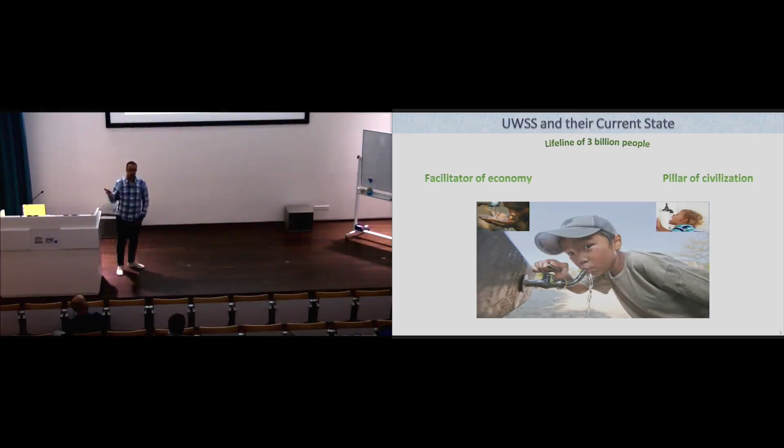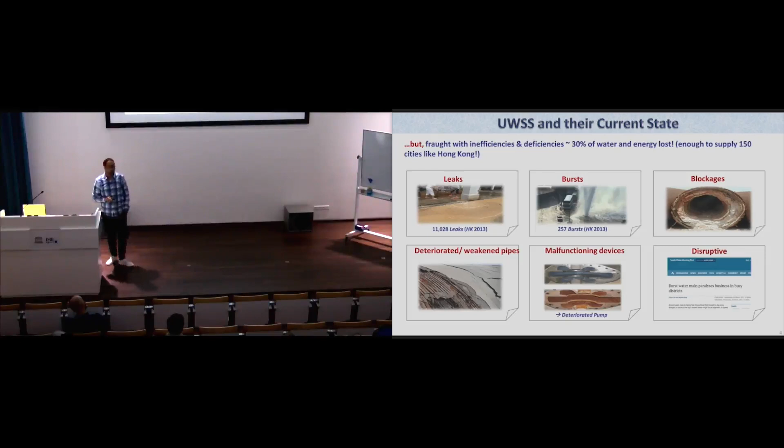Now, water supply systems, they're very complex. You all know that these pipes are underground. You have no access. So things are just happening, and you don't know what's happening. You don't know where the leak is. You don't know where the blockages are. And even if you know, it takes a lot of money to go and fix it, because you have to interrupt the roads. You have to stop everything. You have to dig a hole and do all of that.

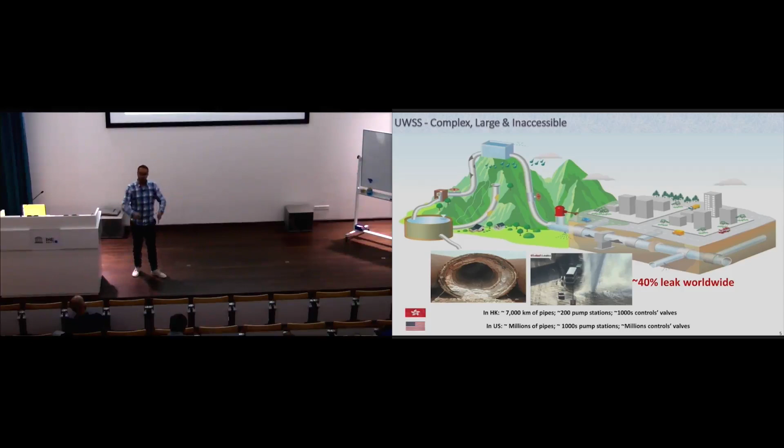Now, the current solutions for leak detection and blockage detection, the most advanced systems, are the Sahara system and SmartBall. This is the most advanced state-of-the-art for leak detection that exists now in the world. This system is basically to send a sensor that moves with the flow, and a guy here listens to this sensor, and if there is a leak, you will detect it. This one, it's a ball. This ball, you basically put it in the pipe, and then you have to fish for it.

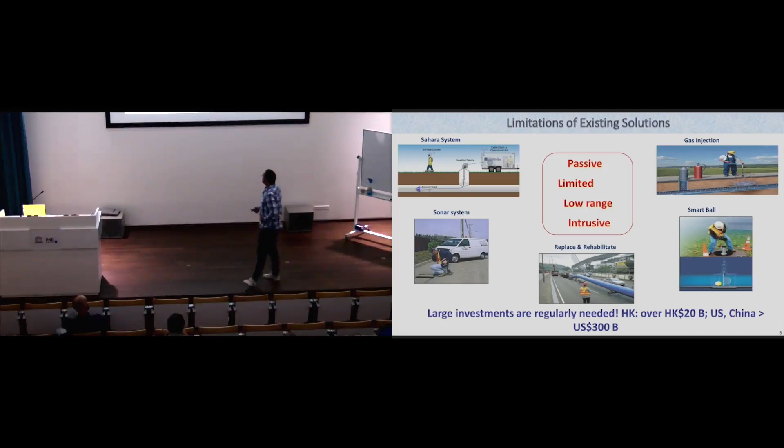Now, what's the problem with these things? They're all passive. They're still very limited, and currently we still have a lot of leakages, even though people are using these systems. They call it the smart ball, but yet it costs about $5,000 to $7,000 US. And after they bought it in China, they ended up with 70% of them becoming blockages, because you put them in, you try to fish them somewhere else, but you don't find them. They get stuck somewhere, and then they become themselves a problem. So you need to think of something else for leak detection.

Now, what we're trying to do is actually mimic other fields, which use waves. Now, waves, we are very used to the idea that you go to a doctor, you do an X-ray, you send electromagnetic waves, and that will give you images of what's happening inside your body, inside your system, right? Sonography is the same thing. You can see the baby if you send acoustic waves, ultrasound, and it shows you the form and image of the baby, right? Some of these waves are used also for defects inside material, and people are using it also for oceanography.

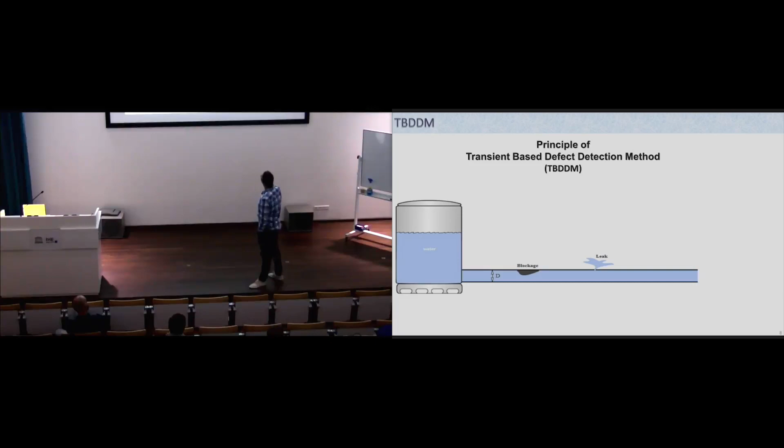Now, we're trying to do the same thing, but with pipelines. Instead of calling it X-ray, we call it transient-based defect detection method. Transient is mainly acoustic wave. That's what we mean by transient wave. Now, the way it works, you have a pipe system like this, and then you come somewhere at a given boundary. This boundary could be a fire hydrant. You go to a fire hydrant, you open the water. This is what we do in Hong Kong. You open the water and you close this valve suddenly, for example.

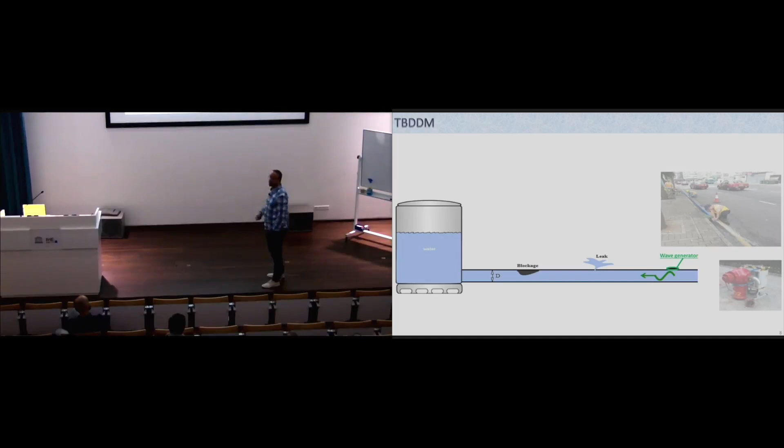Then you create a wave. This wave will start to propagate inside the pipe, and this is an image of what's happening for the signal as you measure here. So as you measure, you meet a leak, a reflection will happen. You meet a blockage, a reflection will happen. We get the signal, we study the signal, and we do some signal processing, and we can tell where the leak is, where the blockage is.

What's great about these methods is they are very quick. The wave speed is about 1 kilometer per second. Now, to feel that, that speed is about 5 times the speed of an airplane. So when we go to the field, within 5 seconds, we do this, we finish the test, we take the data, and we show you what's happening. That's ideal, of course. There are complications which we're going to show you. Now, this is the basic idea.

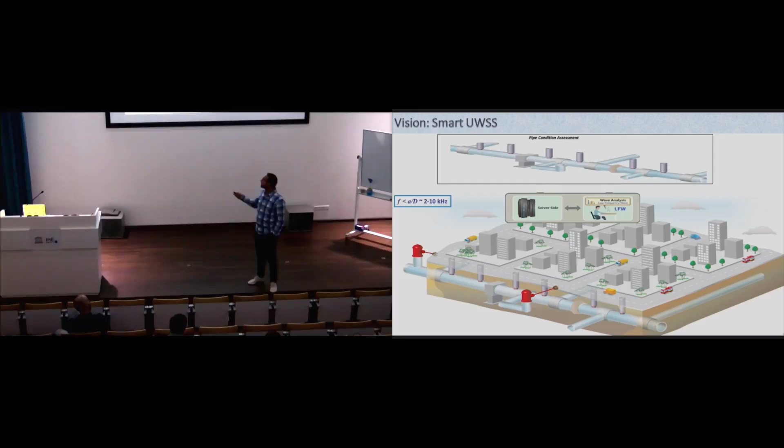Now, the vision of a smart system. What's the vision? The vision is having a network like this. You go to some access point. The access point can only be a fire hydrant because everything is under the ground. You go somewhere there and you send a wave. Initially, we send what we call a low frequency wave.

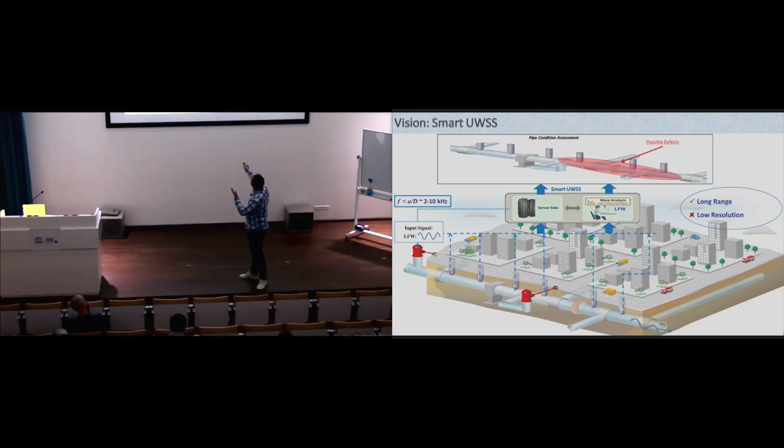Low frequency waves, if it's at low frequency, the wave can propagate for a long range, kilometers. Okay, they can go up to 5 kilometers. However, the resolution is very bad. It means it cannot tell you exactly where the defect is. It can only give you an area. This area could be 100 meters, 200 meters, right?

So what we need to do, once we know that the defect is somewhere in this area, which is a region, then we need to go somewhere closer and send a high frequency. High frequency gives you high resolution. In medicine it is the same thing. You go to ultrasound, that's why they use ultrasound, it is high frequency. X-ray is also high frequency. So once you do that, then you have high resolution. The range is very short and you get high resolution.

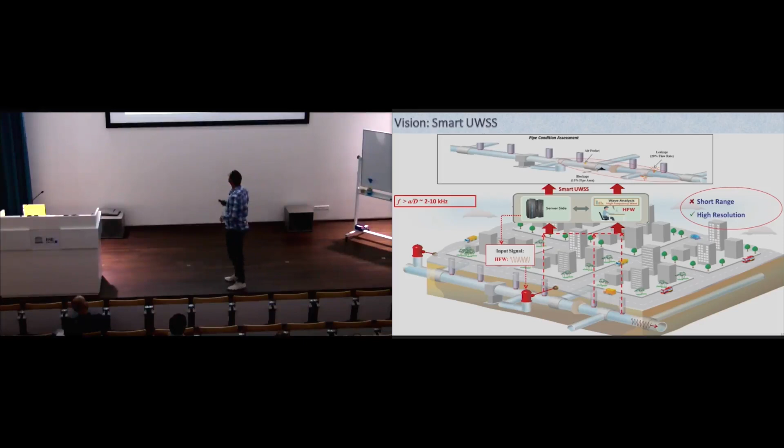Now, this is basically the vision. Send waves, low frequency, get a possible area where the problem is, send high frequency, get good resolution and it tells you where the leak is. This is what we do for the project. Now, our project basically has 4 tasks.

Now, one task is to design experimental setups to validate any results that we need to validate. Task 2 is basically a forward problem analysis. These are mainly the 2 tasks that I usually lead in this project. A forward problem is to understand how waves interact with defects. So if there is a leak and you send a wave, what will happen between the wave and the leak? How do they interact? What kind of reflection am I going to get and why?

This task is talking to signal processing and the inverse problem. The inverse problem is basically a mathematical algorithm: you get some information, you run the algorithm, it tells you where the leak or the blockage is. So these are the detection methods here. Signal processing is, you all know what signal processing is, what type of signal I have to use, how do I reduce the noise, and all of that.

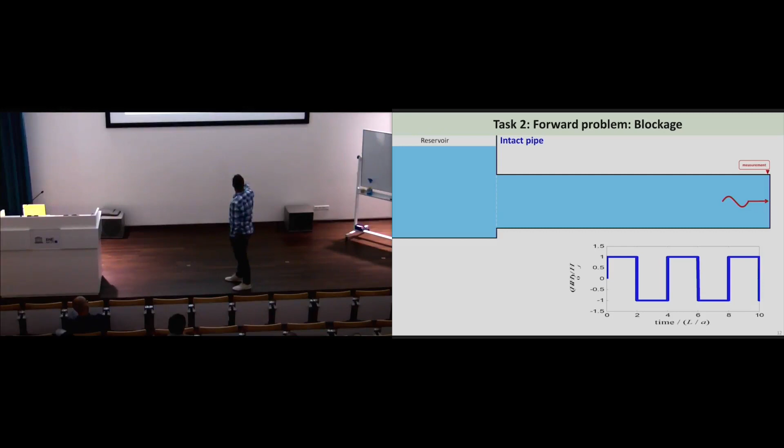Now, I'll show you some work that we did here, and then I will go through the different facilities that we have and show you some examples of the data that we get and the type of detection that we are doing. So I need to introduce this. First of all, we go to a pipe system, we send a wave, and we measure this wave using the transducer, and we get the signal in time domain. This is the type of signal that we get, what we usually call a water hammer type of signal.

Now, we usually work in frequency domain; it's much easier to do signal processing in frequency domain. And then we study the modes. These are resonant frequencies and resonant modes, what sometimes you can call standing waves inside the pipe system.

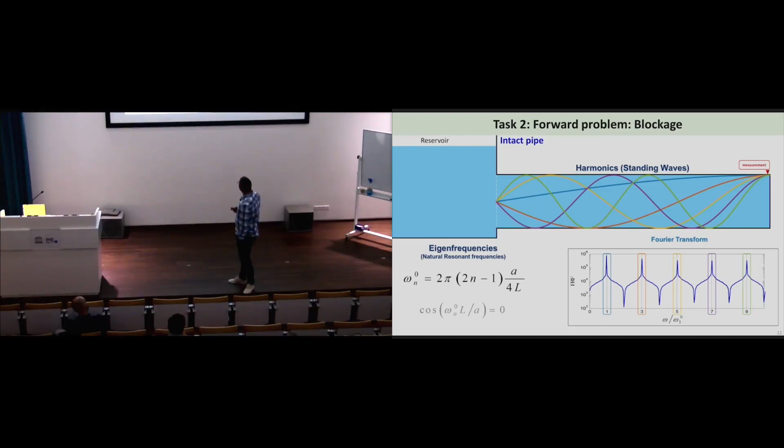But task 2, what we mean by a forward problem, is basically this. When I see a shift going to the left and a shift going to the right, the question to ask is why? Why did that happen? Why has a shift occurred? Why did it go to the left? Why did it go to the right? So that we understand how the wave is interacting with the blockage.

Now we study that, we simplify the problem, and we look at the wave propagating and there is a blockage, and we look at reflection, how much is reflected, how much is transmitted. We do that, we end up with something quite nice, that there are some frequencies at which the wave transmits the most, and some frequencies at which the wave reflects the most. So this is what we call maximum reflection frequency, and this is maximum transmission frequency.

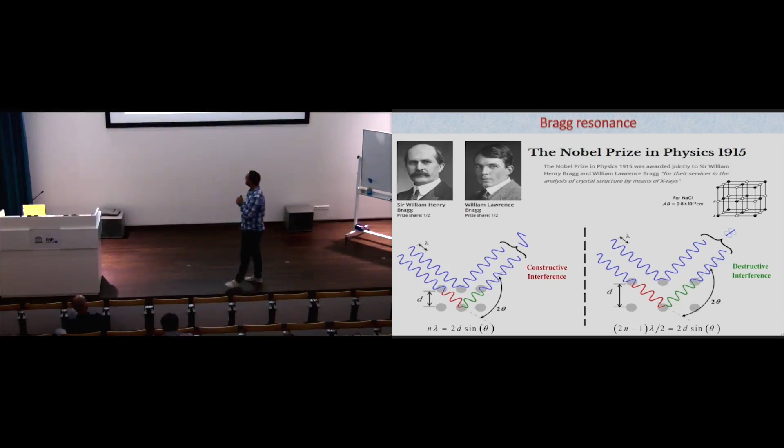So, physically what is happening, you send a wave, the wave at the blockage, some of it transmits, some of it reflects, right? Now, this transmitted wave also will reflect back. Now there is a question. If the frequency is such a way, this reflection comes out in phase or in opposite phase. If this comes out in phase, then you have resonance, because the waves superimpose. But if it comes out in opposite phase, then nothing is coming back. They kill each other. That's how you end up having maximum reflection or a total transmission.

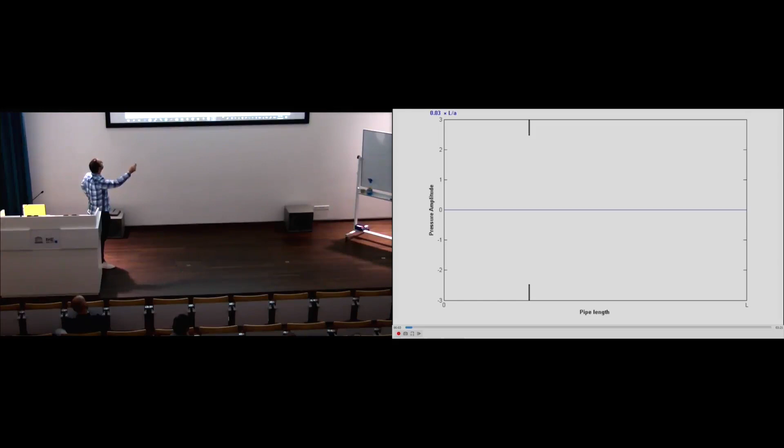So here I show you a video to help you see these things. This is the case for a total or maximum transmission. This is a pipe. You can look at it as a pipe. This is the blockage, and I'm sending a wave from here, and these are open boundaries. Okay, so the wave will come from here, and we'll see how much reflects, how much transmits. Normally, we should have a lot of transmission if I choose the right frequency.

So I speed it up manually, and here is the wave coming. So the wave comes, arrives at the blockage, and then it goes through it, and you can see that the wave is easily going through it. A bit of resonance happens here, but almost all of the wave is transmitted. You almost see no reflection. That's what we call Bragg resonance of maximum transmission. Very little reflection comes back because you cannot have a single frequency sine wave.

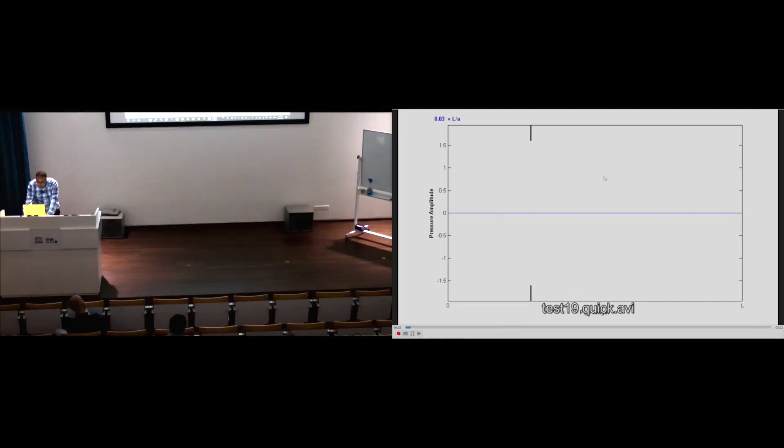Now, look at the case of maximum reflection. Same design, same blockage length, same things, but the frequency is slightly different for maximum reflection. You send this wave, it comes in, and then suddenly you can see that this is how much is reflected and that's how much is transmitted. You see now the reflection is very big, the transmission is little, right?

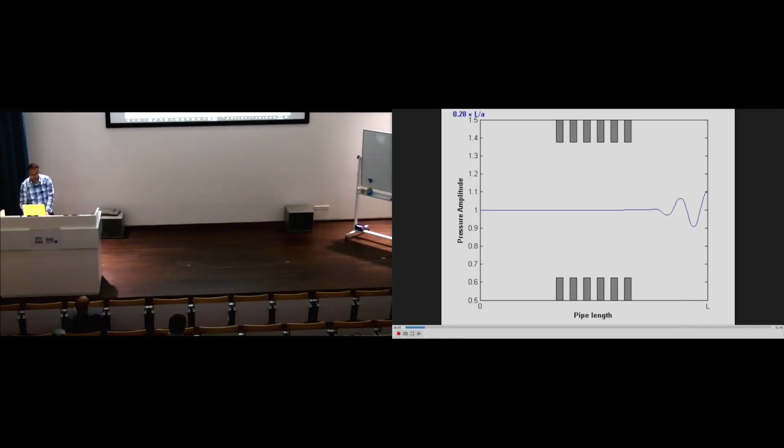A video that is always exciting for me to see for Bragg resonance, this is the case where we build many blockages that actually reflect, and you can see that you can stop the sound from passing for a given frequency. They try to go, but because of Bragg resonance, you have many of these blockages, 6 of them. You can see now nothing can go through, right? You keep sending, you resonate here, but nothing is going through.

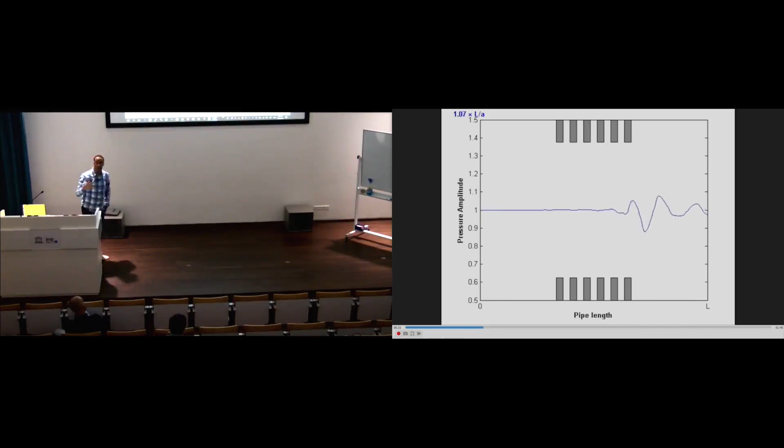So this is what we call a forward problem. Understand what happens. Now, because we understand what happens, we go back to our problem, to the blockage, and now we know exactly why it shifts to the left and why it shifts to the right, and it is well connected to Bragg resonance. That actually helps us improve all the previous methods for blockage detection.

The same thing also happens for leaks. I'll just go through it quickly. If you have a leak, then you have a leak at this boundary, and you have a boundary like this, and you see that Bragg resonance also occurs between these two layers. Maybe not clear, but there is a red color and a blue color. The blue is for intact, the red is for the leak case. For the case of a leak, there is no shifting. These resonant frequencies don't shift, but their amplitude becomes different. You see, this is high, low, and you have kind of an up and down in the amplitude.

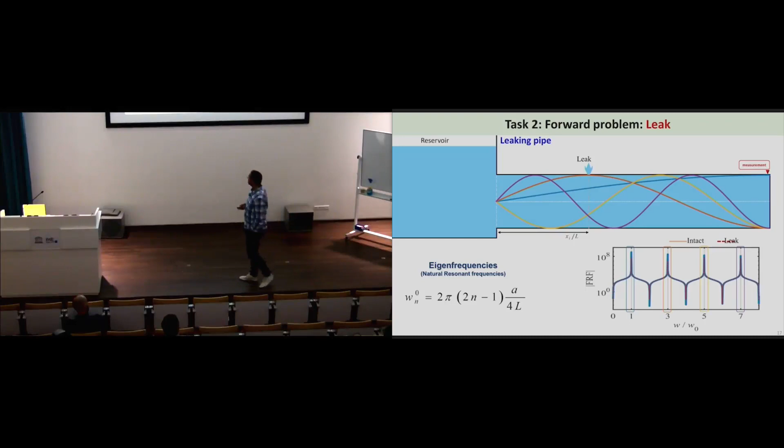That up and down turns out to be also related to Bragg resonance. And that's what we call forward problem analysis, to understand the physics. So basically the same thing. I want to go through this quickly.

And Bragg resonance gives us a big information that if you see a big drop in amplitude, that's because the leak for this mode is located at the maximum pressure. Now you can think about it. If a leak is located at the high pressure point, then you can push the water out. If you have energy, you push the water out, you relieve the pressure. It drops. And that's why we see a drop for this mode. The pressure is high, pushes the water a lot. The water comes out, the amplitude drops, and this is why we notice there is a drop.

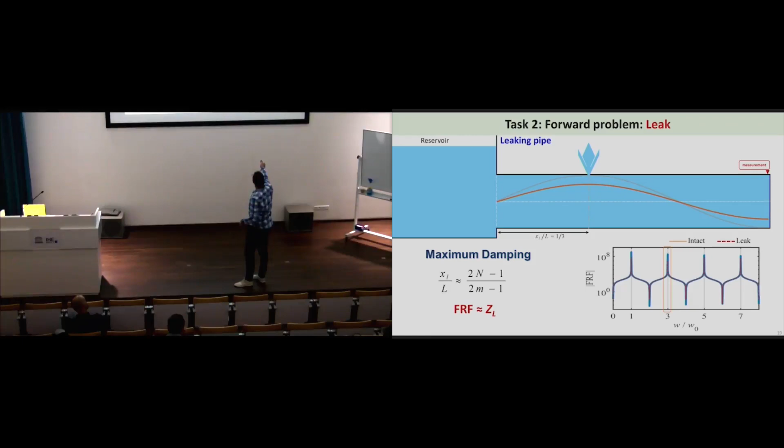However, if the leak is here, which is a zero or a node pressure, then you see no drop of amplitude. That's why you see up and down. You have different modes. Some of them have high pressure, like this one and this one, so they drop. However, this red one doesn't drop. The second mode, you see the amplitude is quite high. That's why you see an up and down. So it helps explaining what's happening, and it helps improving the leak detection methods, and it did.

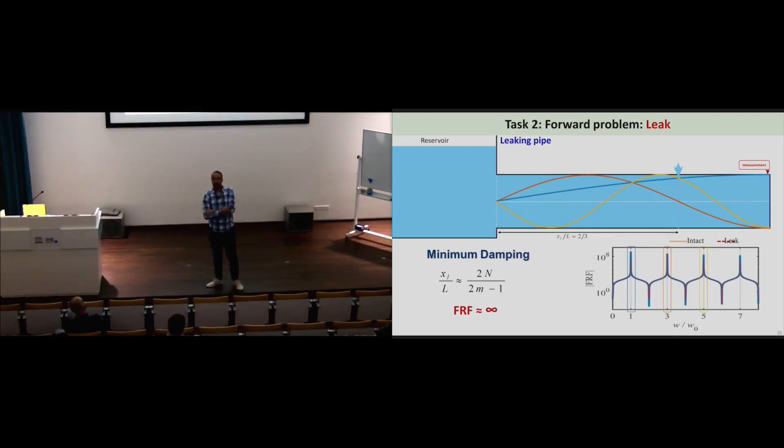Now I go back to the slide just to tell you that now I'm going to go through different results that we found, different methods that we applied. If I show the experimental setup, then that's task 1, and then what we do for task 2, and then what we do for task 3.

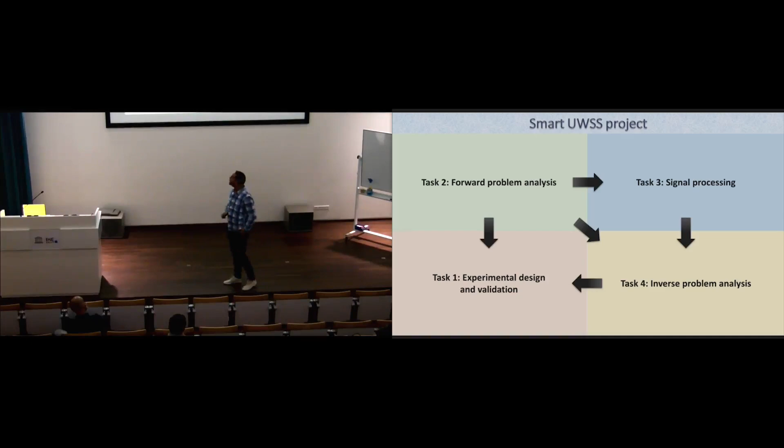Now here is our first experimental facility. So we have 3 in Hong Kong. One is a totally field experiment. The water supply department, we work with them. They give us a place with about 700 meters, a true network. We have access to 4 or 5 fire hydrants. We mainly work with 3. So it's somewhere in the street.

Now you look at this, you say, well, you did not really detect the leak, but given how sharp your wave is, because this is low frequency, you don't get good resolution. The best resolution that you can get is within your wavelength. In this case, our wavelength is within 30 to 40 meters. So that's why the resolution also will be within 20, 30 meters. You cannot get better than that unless you send high frequency. We haven't sent high frequency here yet.

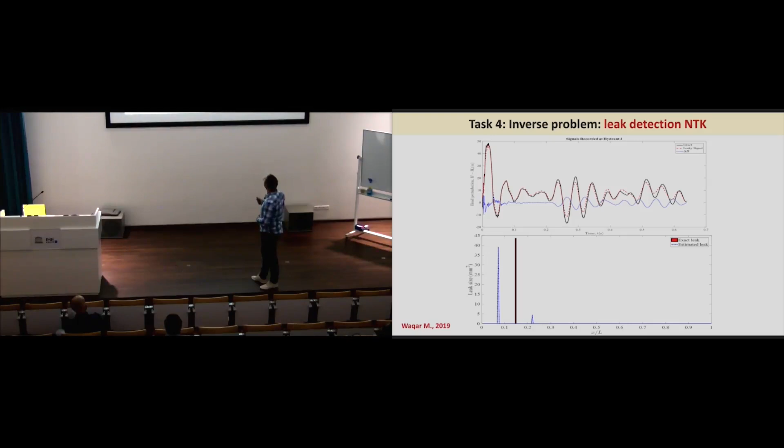Now this is the second facility. This is in Beacon Hill reservoir. It's a reservoir belonging to the water supply department. They give us access from a main pipe. They say, okay, you can take access from it and then build your own pipe. The pipe is 6-inch, quite large. And we build about 150 meters of pipe around it. We have an intake from a true main pipe, and then we build our own pipeline. And this is how it looks.

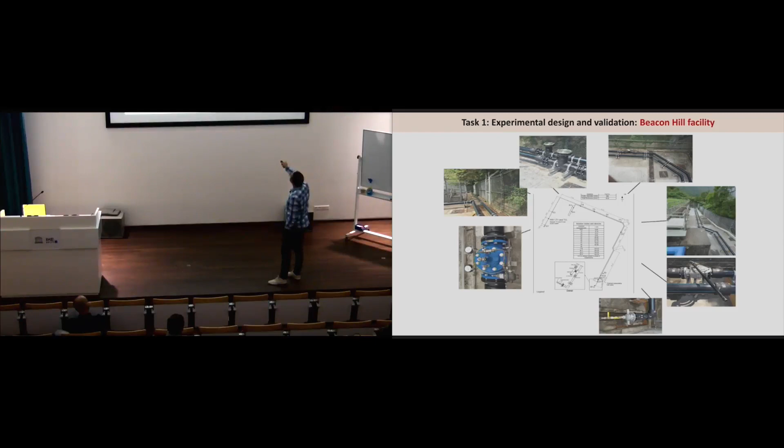Same thing, we measure different locations and we have different places like this where we have leaks. We can simulate leaks and we study what happened. And we have a pressure reducing valve, kind of a dynamic boundary to add in some complexity to the system.

These are some experimental results. We see different leak sizes, because sometimes you can detect a leak, but how big is the leak? If the leak is very big, then the water supply department will tell you anyone can see that leak, right? So we do very small, small, medium, and large, and then you can see a difference between them. The leak is somewhere here. You can see this drop is getting bigger and bigger.

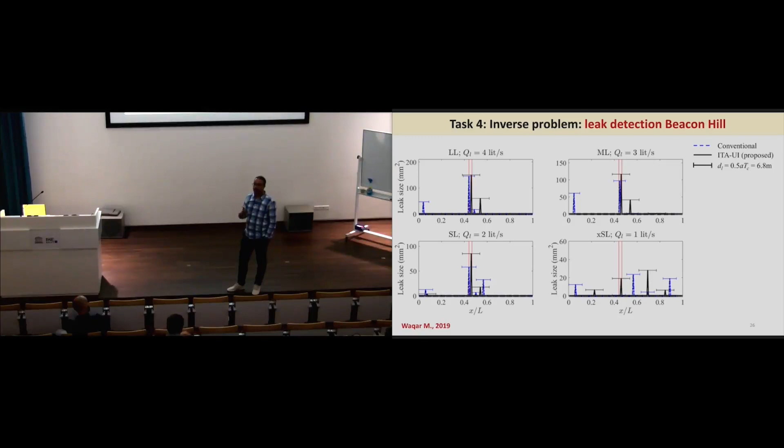Transient, inverse transient analysis. You can see that as the leak gets smaller, the detection is not that big. But of course, you still can catch it, and we keep on improving these methods because you still have some noise that you have to get rid of. So, if you study multiple leaks, in this case, for example, 2 leaks or 3 leaks, we are still able to detect it. Of course, you cannot give the exact location, but you can get close enough. These are real data, right?

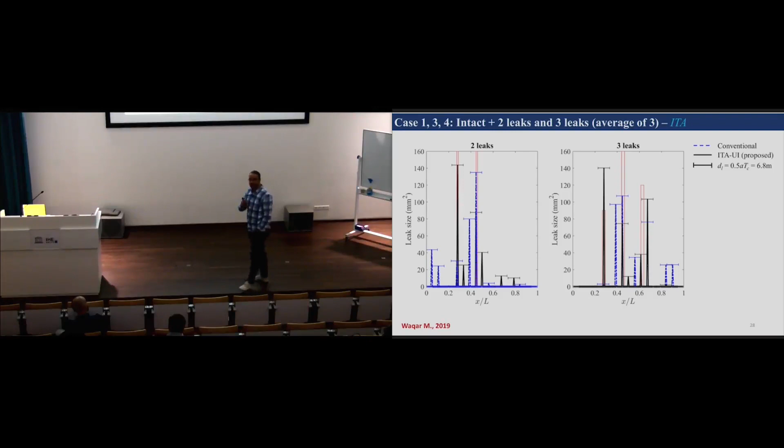And this is the case where we found out that leak detection is very sensitive to the pressure. If you go to Hong Kong, it is all mountains. You actually have high-rise buildings. So the pressure usually goes up to 10 bar. Very high pressure in these pipes. We found that the higher the pressure, the more difficult to find leaks, because leak reflections depend on the acoustic impedance of the leak. And this acoustic impedance is proportional to the pressure. The pressure is high, the impedance becomes very large, and then you get small reflections.

So we studied this. We found that if the pressure is 2 bar or 3 bar, the detection is good. But as the pressure becomes higher and higher, the detection becomes very little. So that's a big problem, and we're trying to find a way that even at high pressure, we can manage to still detect leaks.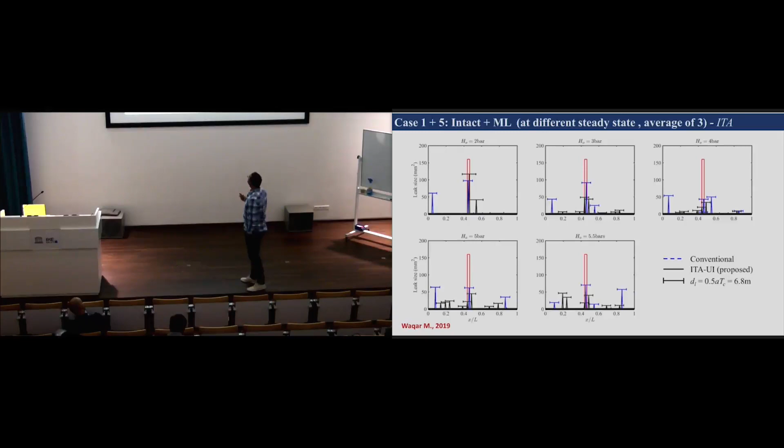Now this is another forward problem we've been working on. This is probably so far my favorite one. This is fascinating. Usually you get damping from a signal, right? You have viscoelastic effect if you have a plastic pipe. You have friction in the pipeline. You send a wave, the wave will start to damp. Now what this student is doing is trying to reverse, and wherever it has been damped, he can actually reconstruct it back.

Now look at this black line. This is numerically a signal with the friction and viscoelasticity terms. Now you can see you have damping, right? The pressure is getting reduced. What this guy does, he will take this signal, the black one, put it in an algorithm, and then bring back the intact case, as if no damping has happened. And that helps us a lot, because usually you lose information through damping. Now there is an algorithm that can give you back the undamped signal. And that way our detection becomes much better.

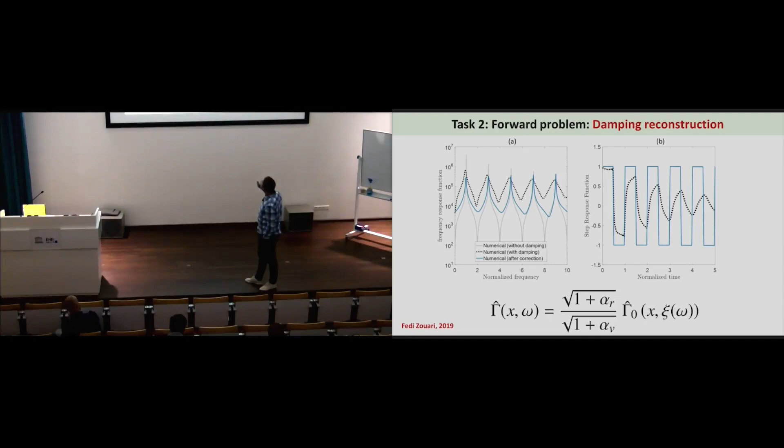Now he was able to do it because he can find a linearized relation between the damped signal and the undamped signal. So that's the relationship that he can build, therefore, this gamma 0, which is the intact case, from this one. This is what we measured, this is experiment, and this is from the model. If you give me this, I can get this one.

So we go to the lab and we try to validate this. This is the HKUST lab, university. So the lab has 150 meters. You can look at this complex system and say, why are these people crazy? You're making complications, lots of bends. Now the reason is, Hong Kong is very small. Hong Kong is tiny. The space is a big problem. So even for 150 meters, we have to go around the lab. Our lab is very small, maybe as big as this one. So we go around 3 times, and we have a pipe. We pump the system from this pump, and this is our downstream end.

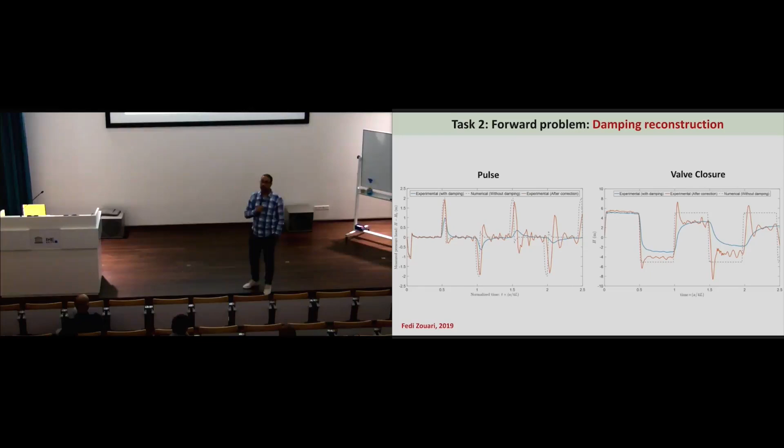We get the signal. The blue is the damped signal. The red is what we bring back. There is some noise, for sure, but you can see that the high frequency, the sharpness of the signal is coming back. And the sharper the signal, the better the detection of defects. For example, this is defect detection. This is what we call area reconstruction. You measure the signal, you give it to me, I put it in an algorithm for area reconstruction. Area reconstruction reconstructs the area like an image for you, how the area of a pipe looks.

So if we don't bring back, I mean, this is a comparison with using damped signal and undamped signal. You can see that one is before correction, one is after correction. Look at this case, for example. The red one is without correction.

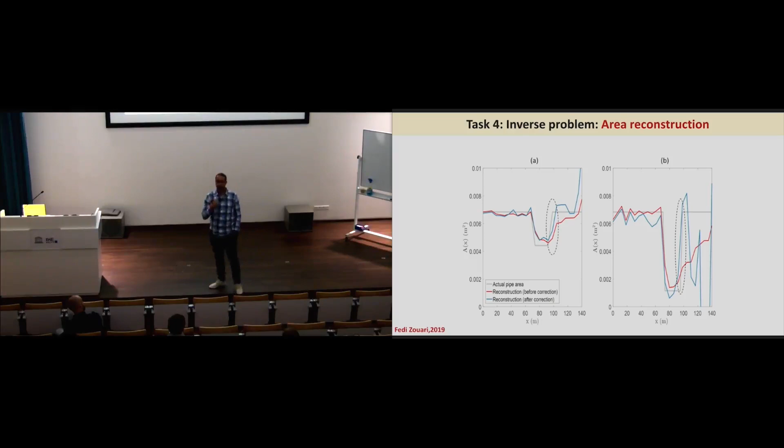You can see that we have a blockage here, and the blockage is poorly detected for the red one, right? But for the blue one, you get more sharp variation. So bringing back the damping, the information loss, actually gives you better resolution. So these are some sort of examples of what we do.

Now, accuracy is also important if you send the right signal. Sending the right signal is very important. If you send a valve closure signal, like a step function, it turns out it's not that good. So we found that sending a PRBS signal, which is a random sequence of opening and closing a valve, is very important. And recently we started to build valves that we can control in such a way we can send any signal we want from the valve.

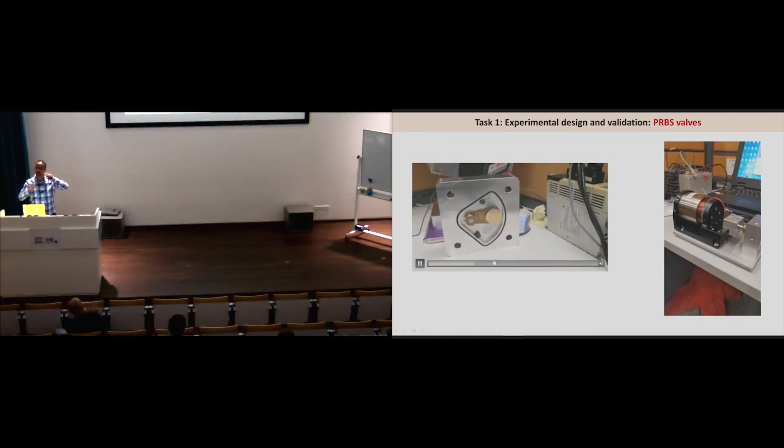This is just a quick video to show you a valve that we just constructed that opens and closes, and you can control the speed, the position, and everything. So this is 3/4 inch pipe, and this one is a 4 millimeter pipe. So this is the valve, this is the linear motor that we just showed can be quite fast to open and close these valves. So just an overview of what we have and what we're trying to do.

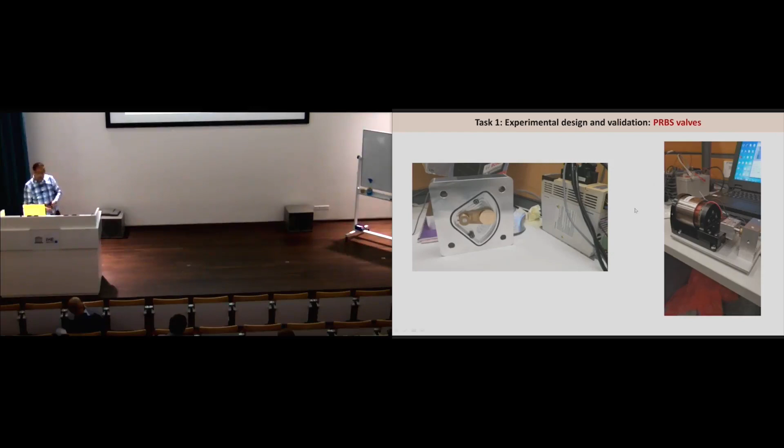So how much time do I have left? Because I'm losing track of time, but I'm trying to go fast.

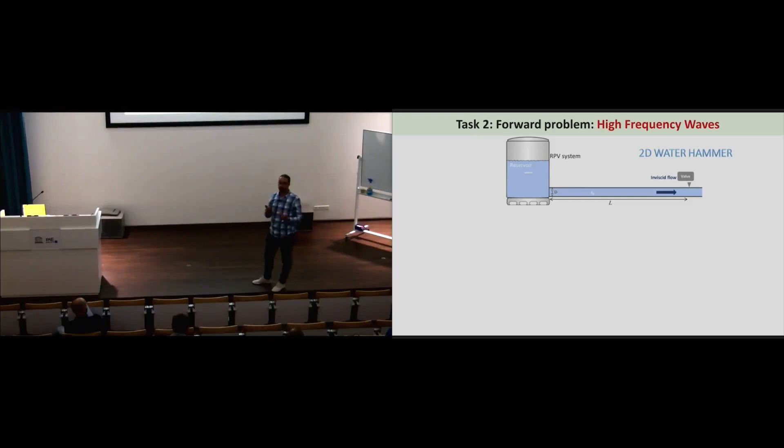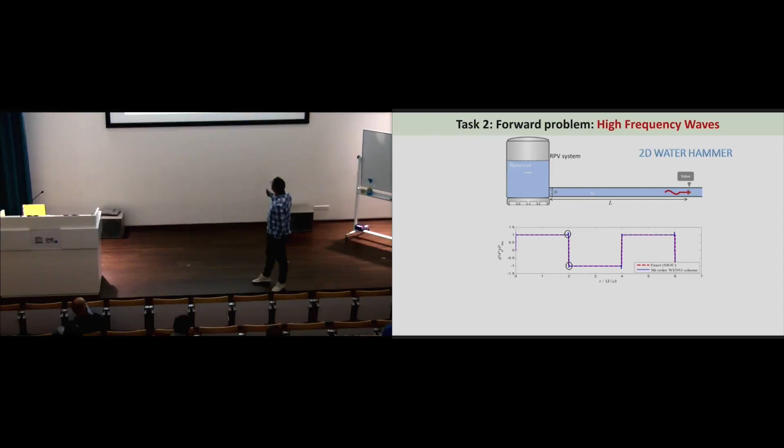So I just now want to introduce what we do for high frequency, very quickly. What we showed before is low frequency. Now high frequency gives you high resolution, what we can do with it. Now what's high frequency? For low frequency you can use a one-dimensional model. You have a plane wave, you have 1D, you can use the method of characteristics, and this is the signal that you get. Now if you go to a 2D model and you do a true valve closure, you end up physically seeing something going up and down. This is not noise, this is actually physics.

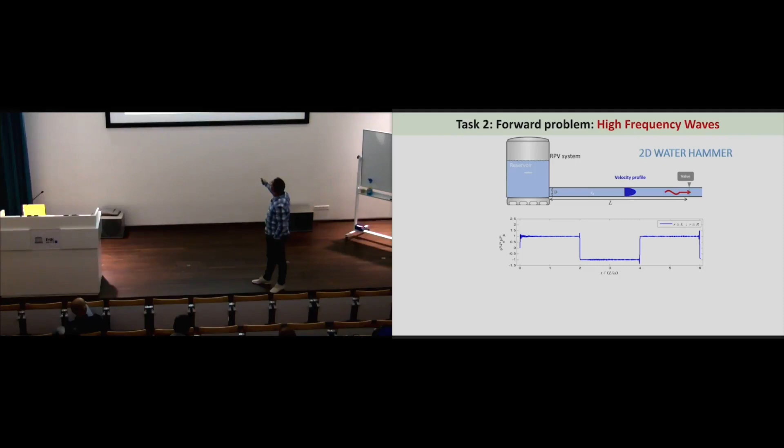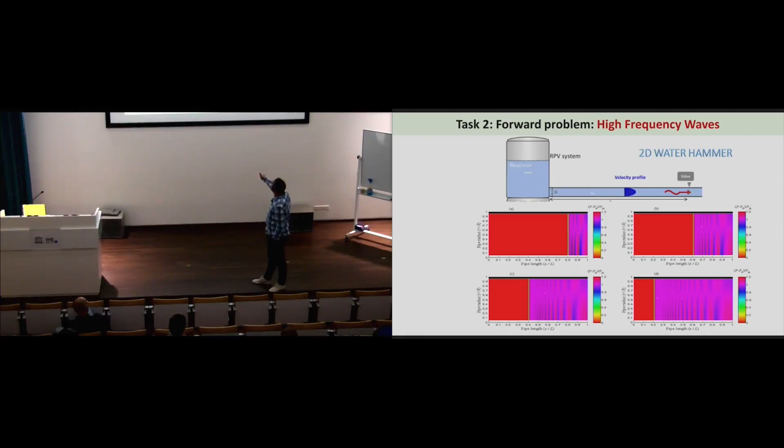If you take it and put it in the frequency domain, you end up with the frequency corresponding to the high modes of high frequency. So what happened is when you suddenly close a valve, you actually can excite high modes. With these high modes, the difference is a plane wave. For the 1D model, you assume that the pressure is constant along the cross section of a pipe. That's what we call a plane wave 1D model.

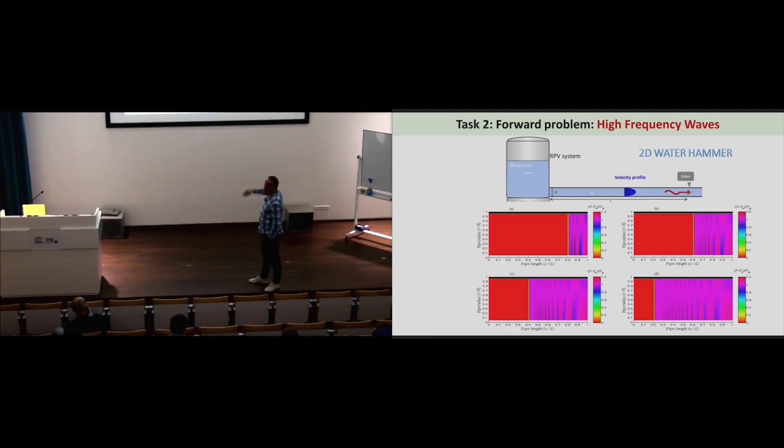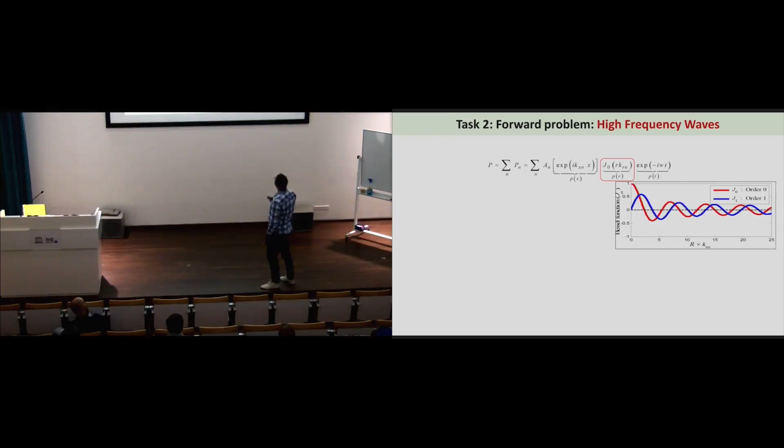However, for high modes, the pressure along the cross-section of the pipe is not constant. It varies. This is a pipe, and this is the cross-section, and you can see blue and red and blue. So the pressure is different along the cross-section at high frequency. So that's very important. We have to take it into account. I'll go quick about this. This is just a 2D model for high frequency to show you that there is a cutoff frequency from which high modes start to be excited.

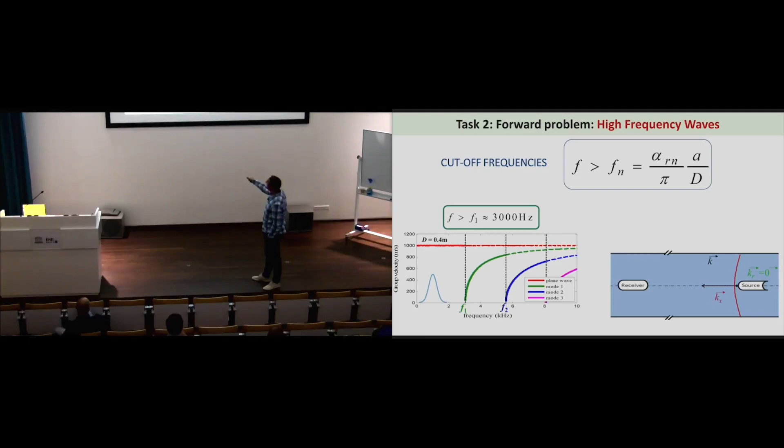If you come here, this is the group velocity, this is a plane wave, and these are the velocities of different modes. If you send waves at frequencies far away from this cutoff, then you have a plane wave. A plane wave simply propagates in a straight line. Okay? That's a plane wave. You can look at it in a video. And this is a plane wave. You can see the pressure is constant. You send it, the pressure is constant. Same color, same color. Low frequency, plane wave.

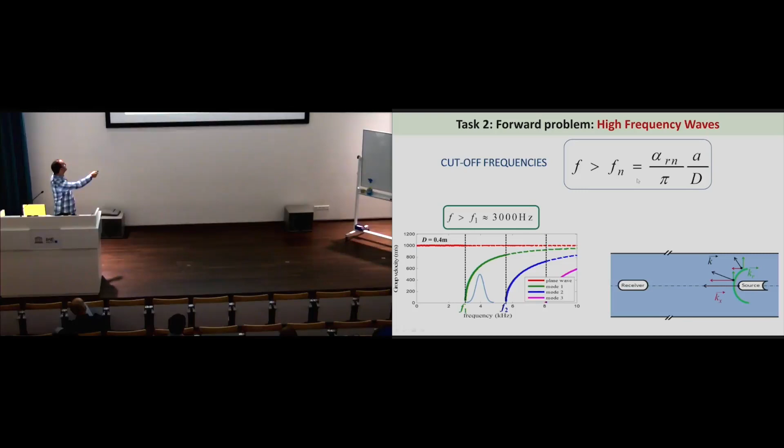Now what happens at high frequency? You go to higher frequency, more than F1. F1 is the cutoff frequency. So you're exciting this high mode. Now, the wave propagates in an oblique pattern, right? You go up and down, down and up. That's what we call a multipath effect. So to have a visual for it, you can click on this.

And you see now, you send, you get a plane wave. This is a plane wave, but you also get one high mode. You see the pressure, positive, zero, negative, and so on. So the pressure varies radially. This is what we call the plane wave mode, and this is the first radial mode. So at high frequency, you get this complication of dispersion. Dispersion means different waves propagate at different speeds, and you get these high modes.

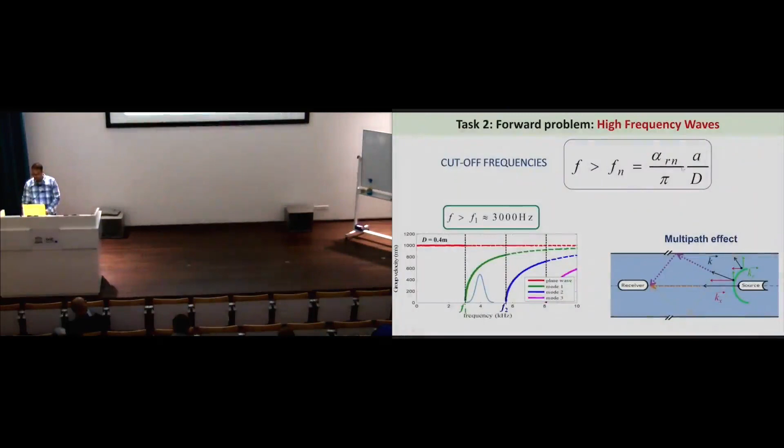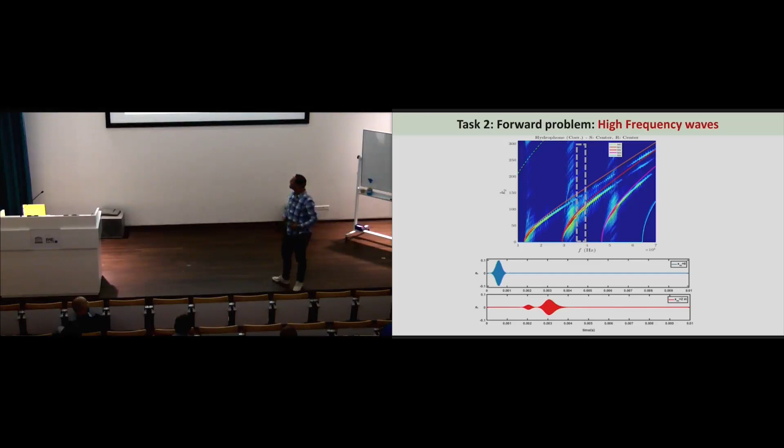Now, these are what we call the dispersion curves for high modes, because these are high frequency. This is from the analytical model, and this is from experiment. The matching is good. I'm not going to say perfect, but it's good for what we need. Once we have a validated model, we have the model and the experiment, you match, and then you can do inverse transient analysis. This is the comparison. This is the type of source that we send. This is experiment, and this is analytical. It has a bit more dispersion than analytical, but that's not a big issue.

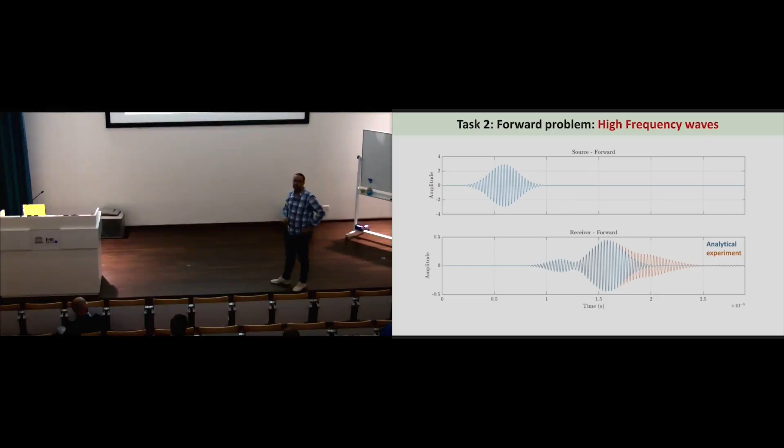The first thing that we did is time reversal. You send a wave, you receive it, you get some dispersion. The question: can I reverse it back? I would like to know what happened. What is the source of this signal that I have received? I can record it, flip it, and then send it back. When I send it back, I find almost the same shape. So that's great. This is what we call time reversal.

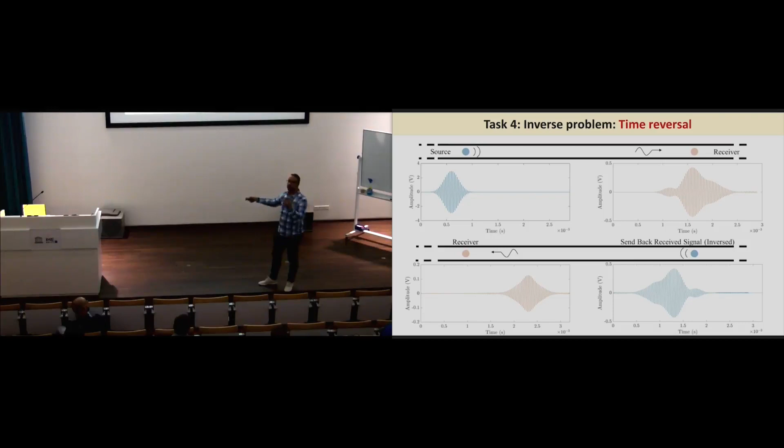Think of this source being a reflection from a blockage or from a leak. If I can catch it, I take it, send it back in my model, and reconstruct the origin of that reflection. Where is it coming from? At which location? That's what we do. It's called matched field processing or time reversal. This is a signal that we detect from a source. You send it from here, you record it, you flip it, you send it back. It tells you the location at which the energy peaks, and this is exactly the location of the source. So we send the signal and we apply matched field processing.

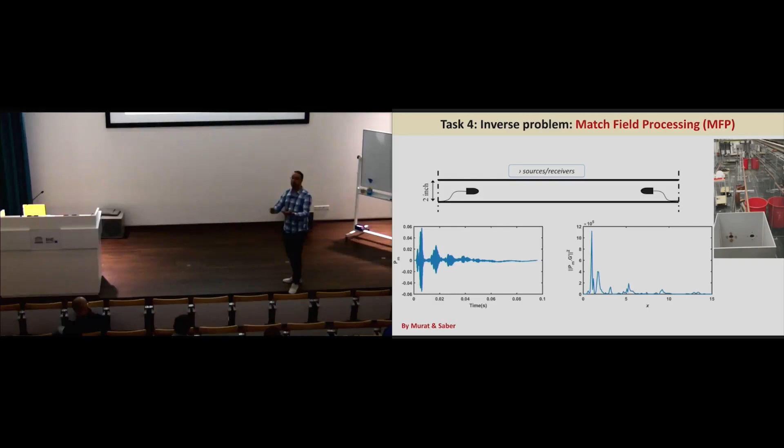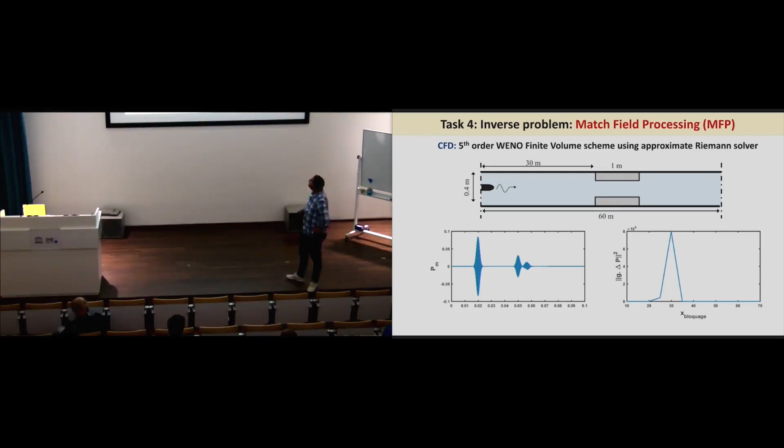So basically, that's the end. There are many other things. If you have any questions or would like to discuss, I'm available later on or tomorrow. I'm happy to share anything you want to know more about the blockage. So thank you very much.

We have 5 minutes before the next lecture, so if there are any questions. I would like to ask one. Thank you very much for the presentation. I've been following the work of Mohamed Ghidaoui. Is he your supervisor or colleague? Yeah, he's my former supervisor. Now I work with him; we're colleagues. He's the PI for this project, and I'm a coordinator for 2 tasks.

I've been following his work for a while now, and I think it's fair to say that out of all these groups that are doing work on transients for leakage detection, your group is probably the most advanced. Bryan Karney was doing a lot of good work, still is, in Canada; in Adelaide they do good work; in Italy, Bruno Brunone and Marco Ferrante. But I quite like the direction in which Mohamed is going.

Now, having said this, I've done some of this work myself about 20 years ago. I have to tell you that the general feeling in the water distribution systems community is mixed about these transient methods, okay? Because a lot of this work still seems to be confined to laboratory setups. Or even if you're dealing with field tests, there are no real networks involved. It's always a long pipe with some sort of excitation on one end and a boundary condition on the other end. Totally agree. Yeah, and this has been going on for a fair number of years.

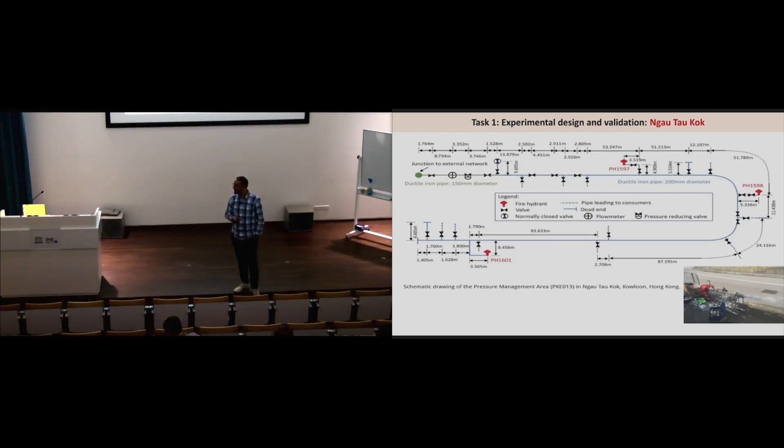In lab conditions, it's not that ideal to have a real blockage, no? Because friction is much higher, you have irregularities inside the pipe that maybe you don't want when you are focusing on understanding the fundamentals of the phenomenon. No, but here we can do it because it's a 6-inch, quite large. If we have the same diameter and they fit, yes, but it's quite challenging.

I think it would be good for a paper for Journal of Hydraulic Research. Sorry? I think it would be good for a paper in Journal of Hydraulic Research. Oh yeah. It was a joke. Yeah, that's fine.

Okay, more questions? Is there a different temperature of the water? Sorry? Temperature of the water? Temperature of what? Of the water when it changes. No, temperature of water is actually not important for this case. Water has a very high specific heat capacity, about 4,100. That means the change of temperature is very little. Usually our state equation will be isothermal. So we don't really care about change of temperature for water. If it's gas or oil, then you need to be careful.